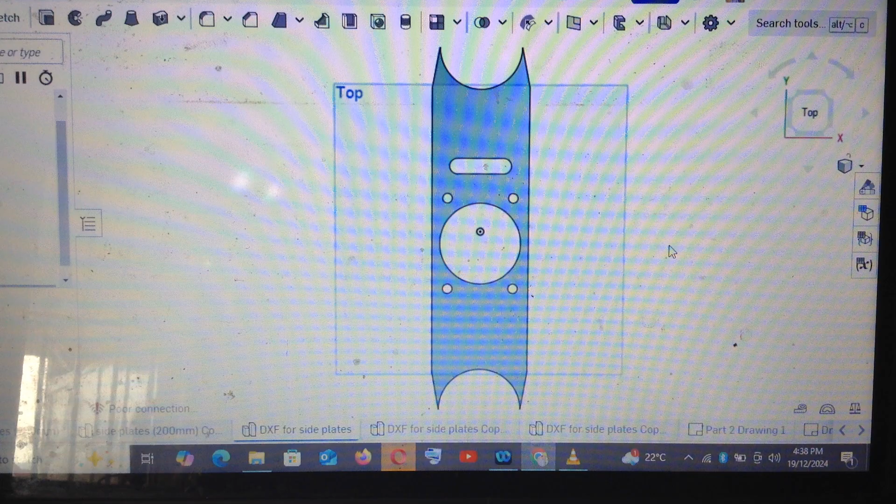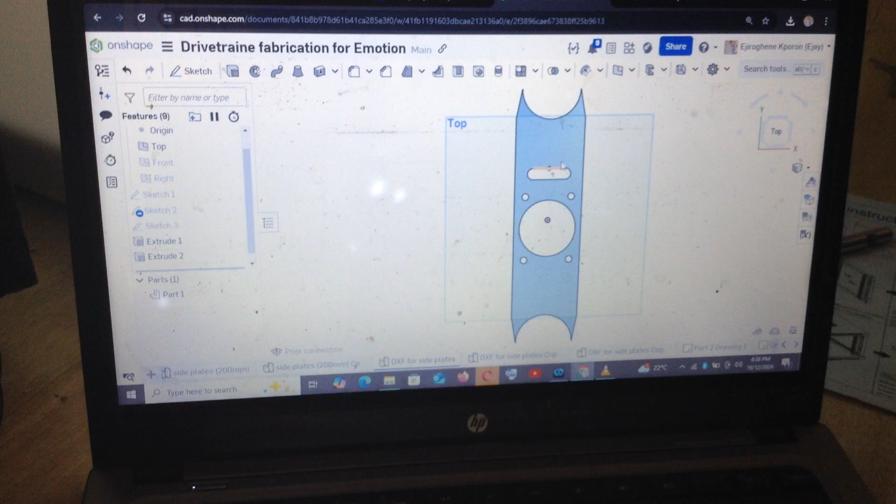Hey guys, I'm over here working on a project while the 3D printer is running, just to show you guys something kind of interesting. So one of the challenges that I've been having for quite a while was being able to basically export a file like this, which is a 3D file, as a 2D file.

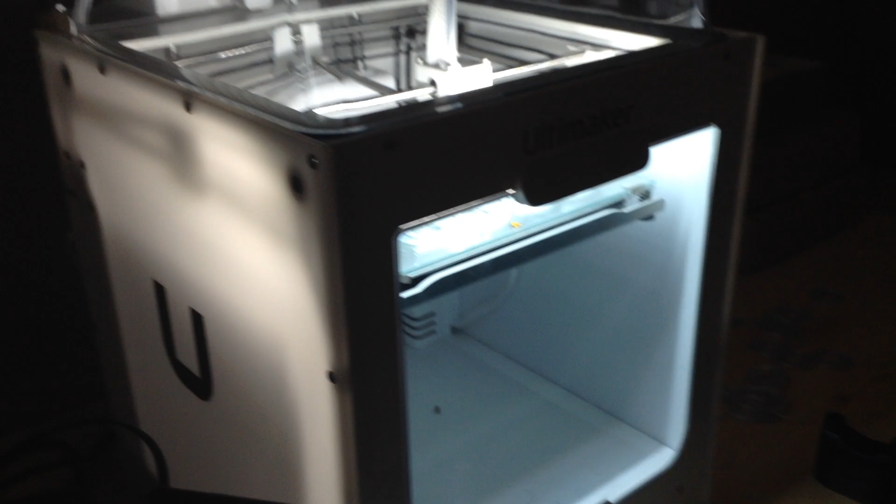So for example, if you want to do 3D printing, you would need a 3D file which is called STL. You would need to take that STL and put it inside of a slicer software like Ultimaker Cura, which is also the manufacturer of this 3D printer. And after you do that, you need to slice the file into layers, G-code. You need to convert the file into G-code for the 3D printer to work.

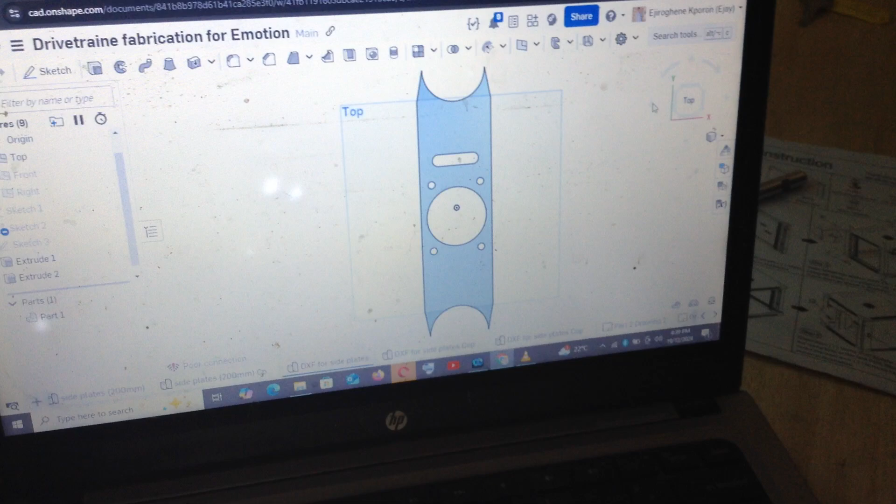Now, I don't want to 3D print this. This has to be manufactured from metal, 3mm thick metal, and you can see the shape. It's kind of complex, and I couldn't just export as STL. Normally, I'll go to here and I just click exports, and then I'll go and do all of this. This format is STL, and over here I never saw any option for something called DXF, right? And DXF is the file that I need.

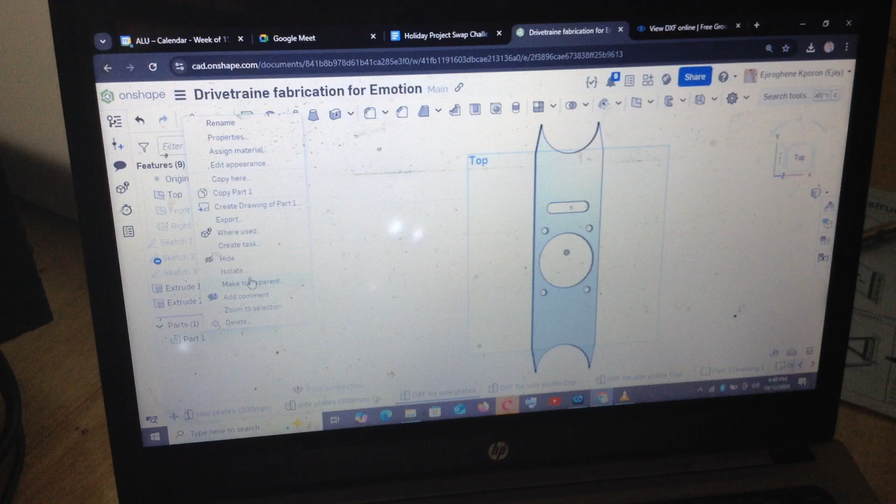But recently, I decided to take a look down the list, and actually there's no option here. I realized I couldn't do that. But what I realized is if I instead click on the face of the object, right click, I can export as DXF, and when I do that, I can actually get a file, right? So this is how you do it.

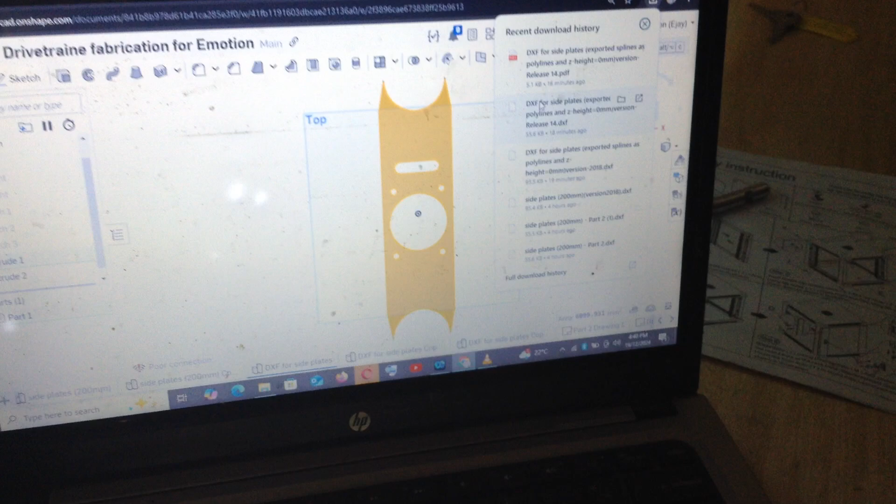And then when you export, I've already downloaded it, so I'm not going to download it again. You can see them here and here. You can see DXF for side plates exported with polylines. I had to put all these details just to be sure, so I know the settings that I chose. Polylines, Z height equals 0 mm.

Sorry about the background noise. Just a sec.

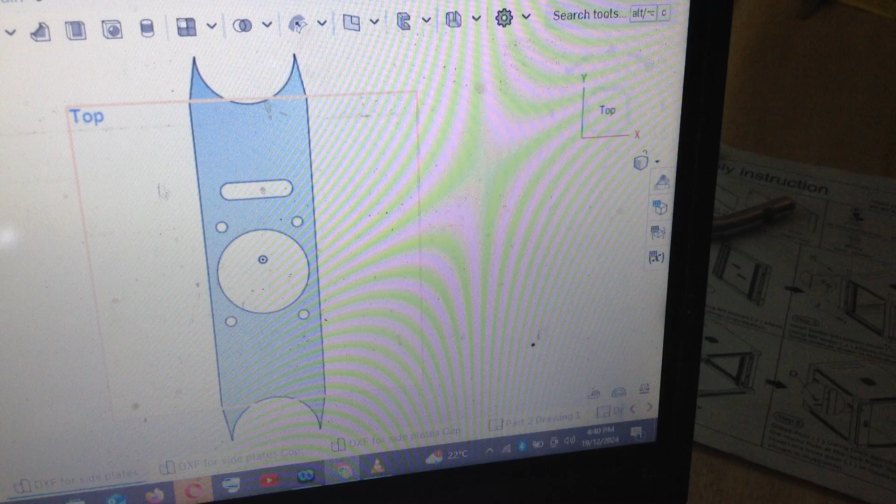And then there's the other one, which is a version. This one is version release 14, while this is version 2018. Let me show you here. You can right click, export as DXF or DWG. Sorry for the noise. Anyways, so over here there are different versions, and I've seen a lot of people going for 2018. But this is also kind of the default that I've seen. So I chose either of those two.

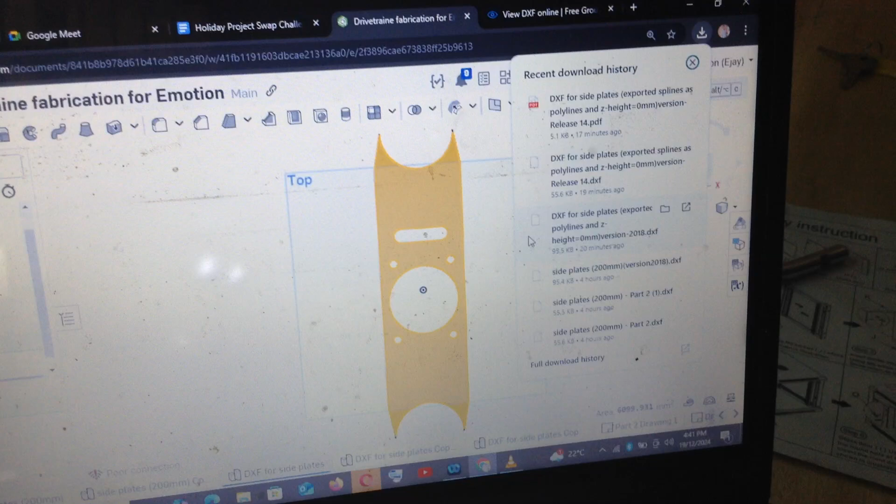And then I wanted to view what that file would look like, because I don't have any software in my computer. Jeez, the background noise, guys. I don't have any software in my computer to actually view this. So what I did was go online to search for an online platform that I can actually view a DXF. All I did was just type DXF file viewer online, and I clicked on this random option.

I clicked there, and it loaded me up to this website. So I just need to put my file here. What I did first, I tested either of those two file formats. And this is why it's important to test, because I need to be sure that when I send the file out to a manufacturer, it will actually work. So I'm trying first release 14. And I drop it here. Let's wait for a sec.

And it looks like, I don't know if anything has happened, but I can't see anything. I'm scrolling down, I see nothing. It's a blank sheet, guys. Sorry about my screen, it's a bit dirty, but it's a blank screen. But actually there is something there. I've tested this before. If I go to present, I still don't see anything, it's blank.

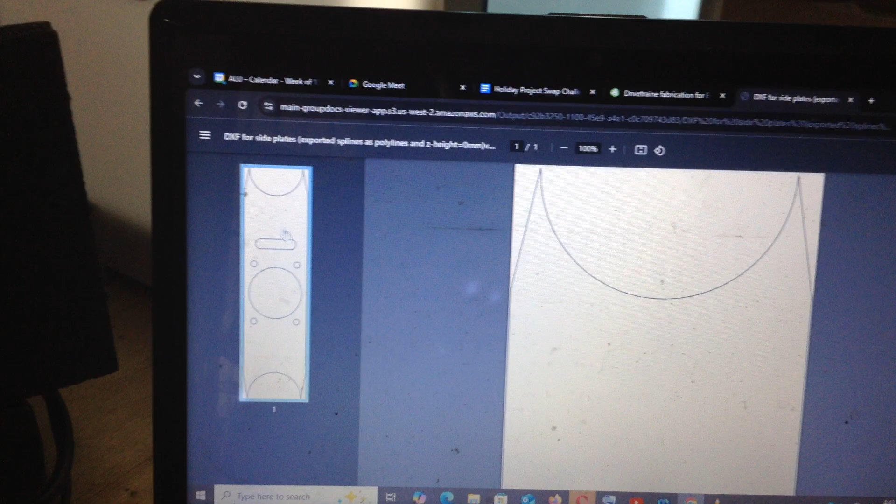But if instead I go to download PDF and it generates a PDF file, you'll see actually that there's something there, which is the actual file. So I don't know if this will work if I send to a manufacturer, or if it's going to bring some issues, but anyways, the PDF does show the outline like I wanted. So just a 2D view of that same file from the face that I selected, which is brilliant. I can come and just download for keepsake. But what I need is something reliable.

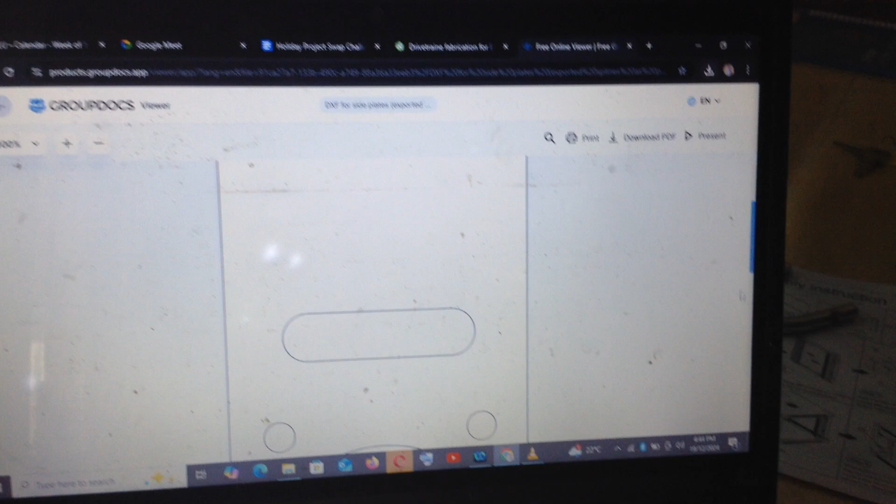So let's go back and try this again, but instead of release 14, we will try the version 2018. Let me quickly drag and drop that and wait for a sec. See what happens. And boom! This is exactly what I expected from the first go, right? This gives me everything. I can come to present and it shows up, and there's no issue there. I can see what the file looks like in 2D.

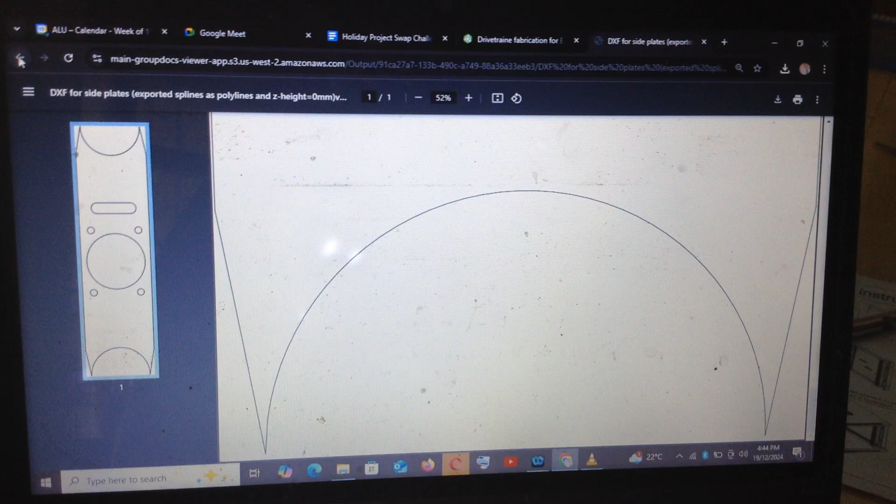I can go to download PDF, and same case like the previous one. The PDF generates very well with the side view there, and then the entire file zoomed in. So like I said, guys, this is exactly what I needed. I will be going with this version 2018. I don't know if this is a constant for all cases, or if in some case one will be better. I'll be experimenting as time goes on to see.

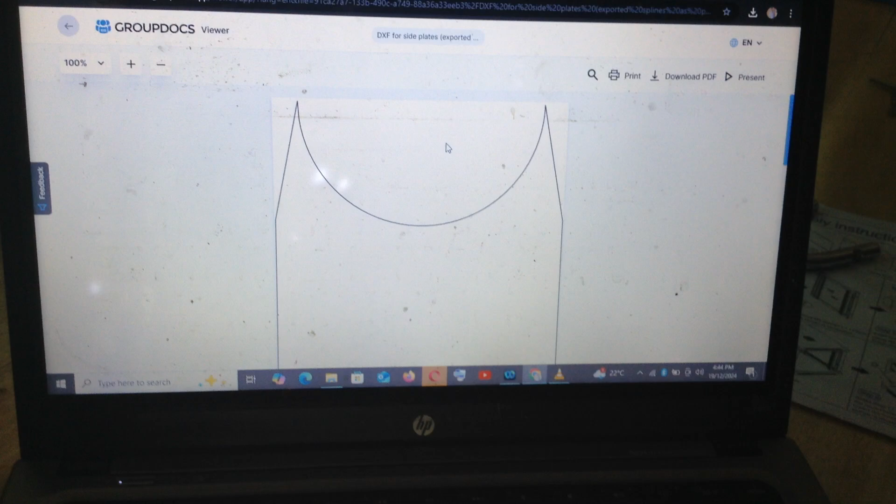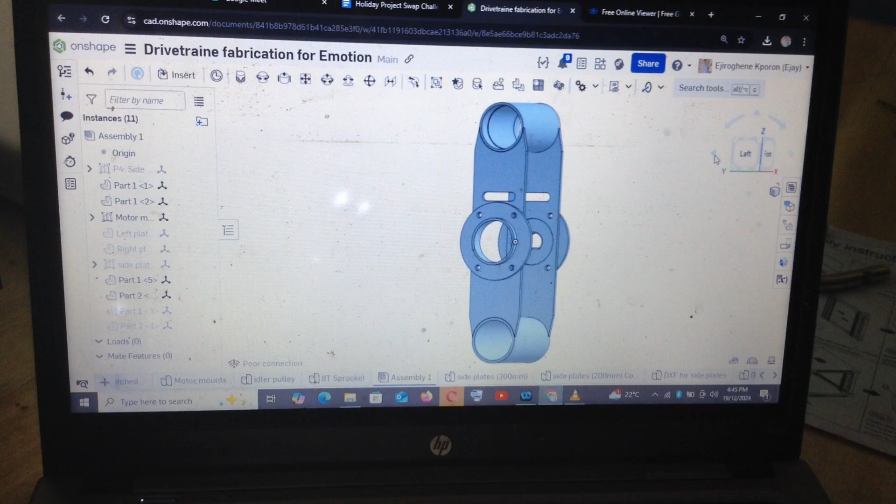But this file is going to be sent out for laser cutting. So that is why I need it to be as accurate as possible. I know the laser cutter might not be able to get this very sharp edge, but I don't really need the sharp edge. It's just the entire part, which actually fits into this assembly. So this is how it looks when it's all assembled, right? You can see there's two plates on the side, and then there's a mount from one side. You get the details later when I share.